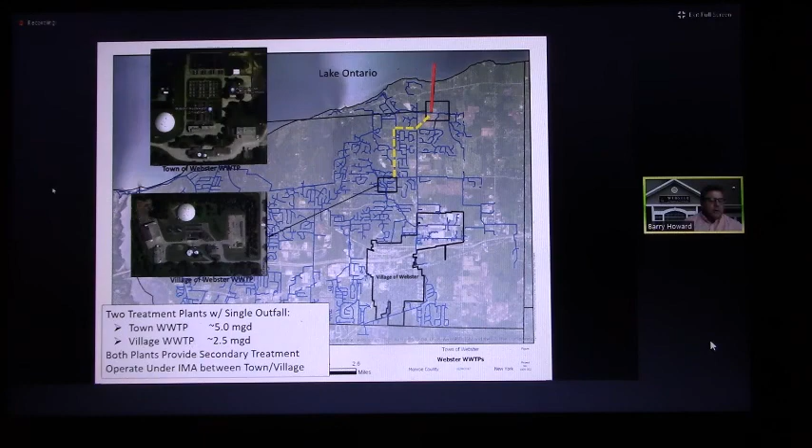So let's look a little bit at the timeline. We have 2 treatment plants right now with a single outfall. We have a treatment plant with the town on Phillips Road that handles approximately a capacity of about 5 million gallons per day. The village wastewater treatment plant on the corner of Route 250 and Wall Road can handle about 2.5 million gallons per day. Both plants provide secondary treatment. Both operate under an intermunicipal agreement, an IMA, between the town and the village. And you can see pictures of those 2 plants in that screen, and then the common outfall in the red line that's there.

So the timeline was that things started back in 2016. The sewage treatment plant issues with both the town and the village have been going on for some time. In the town, in 2016, they did an engineering report. They did phase 1 design, and then construction started in 2019. And phase 1 construction should be completed by December of 2020.

At the same time, in 2017, the village began their engineering report, and they did some funding applications in 2018 and in 2019. And then they started in 2020 in earnest a regional versus village-only evaluation. And then we can go back also on that regional evaluation. We can look at the fact that there were informal discussions back in 2016.

In 2018, there was an October village workshop with a regional alternative overview. And then there was a village committee formed in 2019. And then in 2020, at the beginning of the year, began the monthly joint project committee meetings, which included representatives from both engineering firms, from the town board and staff, and from the village board of trustees and staff.

The next step will be that the village board needs to make a decision, and that's pending into the future. So we've got an idea on the project timelines, and we'll move forward here. And I'm going to introduce Clem Chung from Labella, who's the project manager on the village side, and he will make his presentation now. Thanks, Clem.

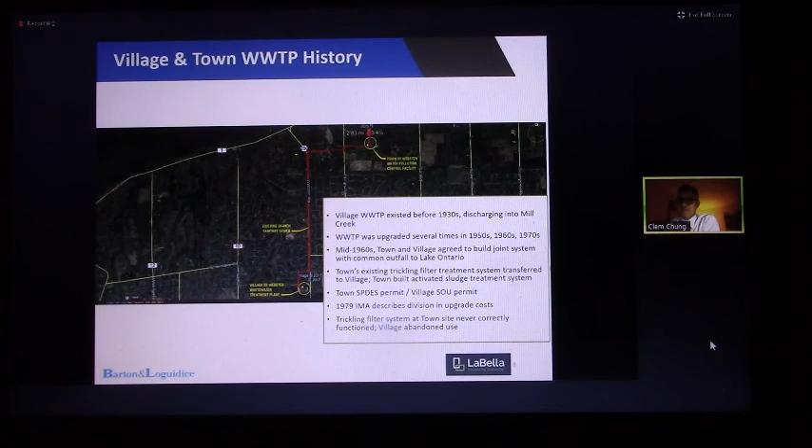In the 1960s, the town and the village came together and agreed to build a joint system with a common outfall into Lake Ontario. At the time, there was a treatment plant both at the town site and the village site that looked very similar. So we'll talk a little bit about the types of treatment systems that are there right now. The one at the village site is called a trickling filter. It's a type of secondary treatment. And the town had a very similar process there.

As part of the agreement between the town and the village in the 1960s, the village agreed to take over the facilities that were there at the town site, and the town would build a completely different type of treatment system called an activated sludge treatment system at the town site, and the flows would be separately treated through each system, so that the village would still be responsible for treating its flows for the most part, and the town would be responsible for treating its flows.

The DEC, or the EPA I should say, required that the town be the entity to obtain what's called a SPDES permit, which allows the municipality to discharge the wastewater after it's been treated back into the environment. So that was the setup that was created. So what happens is there's the two plants at the two sites. The wastewater from the village site goes to or through the town site, and it connects with the wastewater that's been treated in the town plant in a pipe.

There is a little bit of treatment that goes on there that's kind of joint. The town adds a disinfection chemical, chlorine, to the discharge from both plants, and then that treated flow goes out into Lake Ontario through a single pipe. So that's the town's responsibility under their SPDES permit. The village has, as Barry mentioned, an IMA, an intermunicipal agreement with the town to kind of share that treatment and share the costs of maintaining and operating that system.

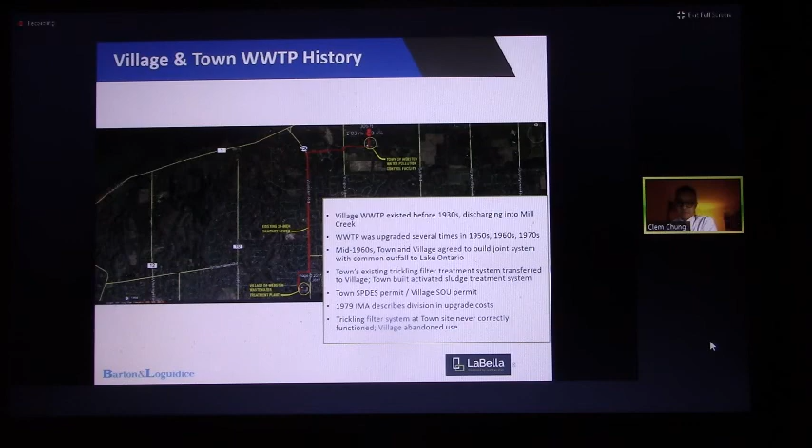So as Barry mentioned, there were separate evaluations done on the village plant and the town site, and they were both instigated by conditions that were deteriorating at both of the facilities. So I'm going to talk about the village project, and then Ken Knudsen from Barton & Loguidice will talk about the town's project. So jumping ahead a little bit in history, just some of the more recent things that have led to the condition deterioration at the village site.

There was a deteriorating, what we call headworks. So that's the facility at the beginning of the plant that takes out all of the large debris, rags, grit from the wastewater, and protects the downstream processes. That structure and process was constructed in 2007. Unfortunately, prior to that point, all of that material that hadn't been removed eventually got through the process and started impacting the operation of the anaerobic digester.

So in 2015, the village realized it had a problem, and they hired LaBella to start looking at the condition of the digester. There were some recommendations for fixes and to upgrade the digester. At the time, it was considered an emergency issue, and actually in 2016, it got to the point where the gas piping within the digester broke and caused a safety hazard. So the village had to do something immediately. They couldn't plan for a capital project to upgrade that, but there was a significant price tag to that.

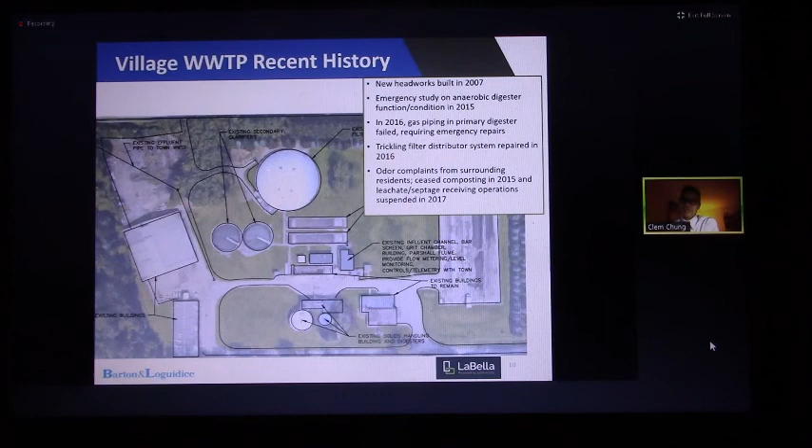One other issue that was pretty significant to how the plant was operated was that there were some odor complaints from the surrounding residents. The village believes that the majority of that came from the operation they had to compost their sewage sludge. The location on the site was very close to the road, and they were concerned that was what was causing those odor complaints. So they ceased operations of that in 2015. They also curtailed their leachate and septage receiving operations in 2017 to further help mitigate those issues. But in the end, there were some additional upgrades that were needed for the plant, which I'll talk about in a minute.

So, as I mentioned, there were some alternatives that the village asked us to take a look at to upgrading the plant, and those were potentially taking the flow to the town's plant, and also taking the flows to Monroe County and discharging into their plant at Van Lare, which is near Durand Eastman Park.

So the first alternative we looked at was taking it to the town. The way that we envisioned that upgrade was to decommission the village plant and then take the flows through the existing pipe that connects the two sites, and essentially rehabilitate the infrastructure that hadn't been working back in the 60s, basically make that more viable. We didn't look very closely at the treatment process that the town currently uses, because we knew that the town was looking to upgrade their facilities, and we knew that Barton & Loguidice was doing their own evaluation.

So at this time, we needed to submit a report to start the funding process, and we didn't have time at that point to wait for the other analysis to be concluded at the town plant. So that's kind of what we looked at. If we were to look at what made the most sense, we probably wouldn't have considered that as a viable alternative the way that we had in terms of rehabilitating the village infrastructure at the town plant. So that kind of leads on later to this discussion about the regional alternative. The estimated cost of that analysis was about 11.6 million back in 2017.

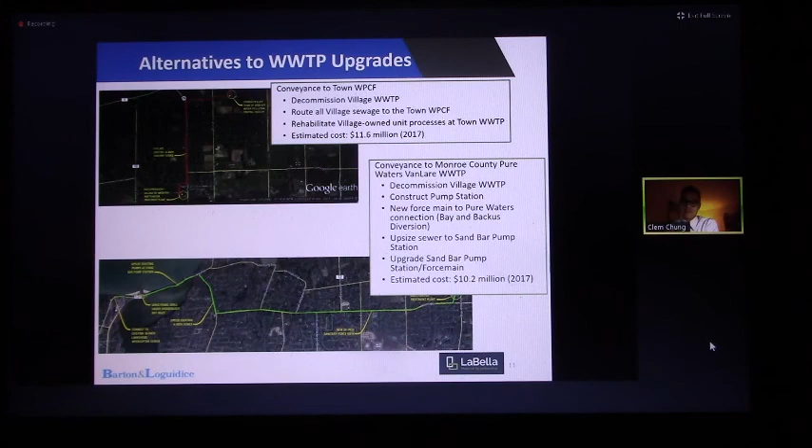So looking at the biggest change really is with the new administration at the town. They've evaluated the recommended upgrades to the village-only project and said that if the village were to go ahead with those projects, they would require the village to update the IMA and also to obtain their own SPDES permit. So in order to acquire that permit, we had a conversation with the Department of Environmental Conservation, DEC, and asked them what would we need to add to the original recommendations to make it such that the village could get a SPDES permit. Our assumption during the evaluation was that the existing situation with the IMA and the SPDES permit would continue.

So with those changes, the DEC said, well, you're going to have to increase the redundancy of your secondary process. So in that case, it would mean decommissioning the existing trickling filter, which is kind of oversized for the flows that we currently see, and replace it with two individually smaller units but have the same capacity as a combined unit to treat the flows. We would also need to include disinfection for the village itself. So right now, as I mentioned at the beginning, the town provides that service to the village. This would require an upgrade to the village plant to allow that to happen. So we would be looking at the UV disinfection system to be installed at the end of the treatment process for the village.

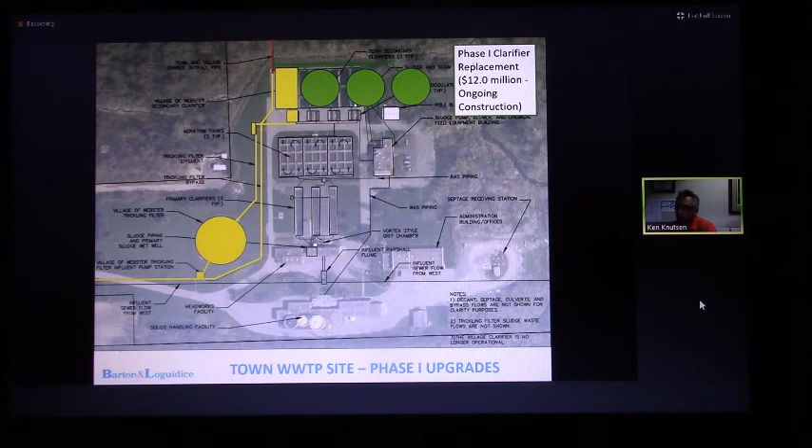Those were in critical condition, and that said, the town opted to divide the recommended improvements up into phases. Phase 1 project, which Barry noted on the timeline, commenced in earnest in 2018 through design, started construction in 2019, and essentially has consisted of the construction of 3 90-foot diameter circular clarifiers to replace 3 pre-existing rectangular clarifiers. This is a fairly substantial project. It's a $12 million project, which the town has secured a $3 million grant for.

Progress has been pretty substantial to date. So to orient you here again, this is the effluent sewer from the village treatment plant going to the common outfall sewer, which heads out to Lake Ontario. This was where the rectangular clarifiers were. This is new clarifier 3, new clarifier 2. These are online and operational right now, which has now then allowed the existing rectangular clarifiers to be taken offline.

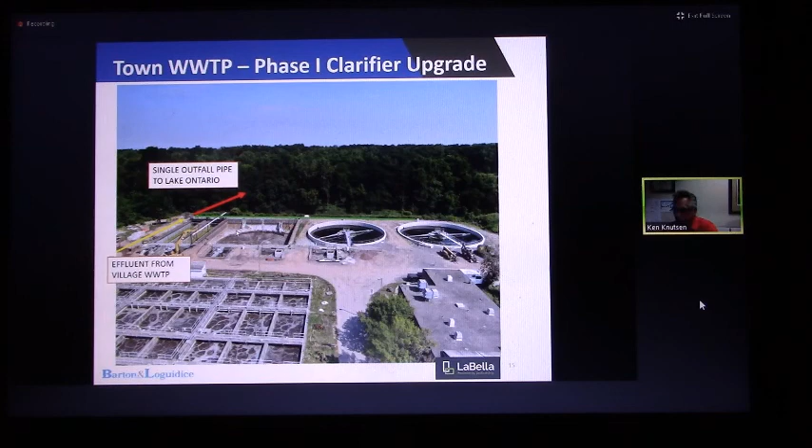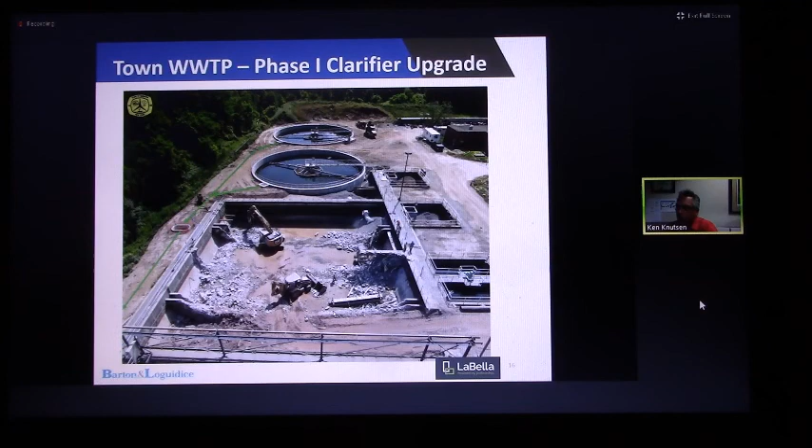As you see it here, phasing of the project was very important, led to some of the costs of this, but it also allowed the contractor to creatively use the existing clarifiers as support systems for their trenching. You can see that, again, the village's existing clarifier still remains intact. That would be recycled in the future, which I'll get into.

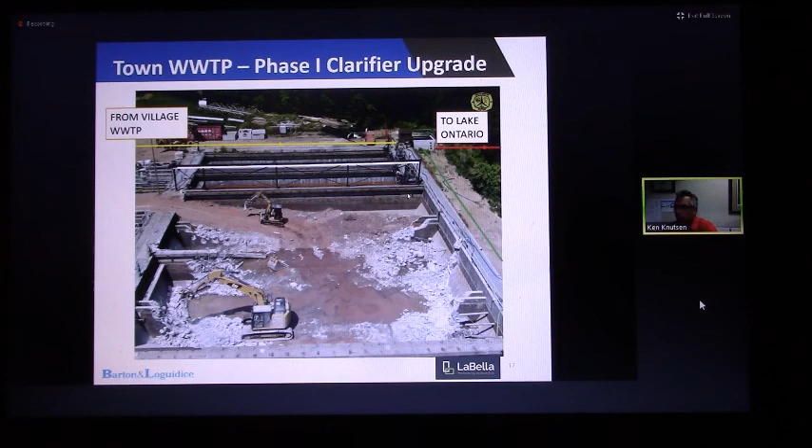We did drop in a new outfall pipe from the town's clarifiers into a new structure. So again, right now the village's effluent comes into the structure treated. The town's effluent comes in here treated. The town chlorinates, and the combined waste goes to Lake Ontario. It's chlorinated. And here's an aerial drone shot of the amount of steel that goes into a 90-foot diameter clarifier, just to give you some perspective on the size of these things.

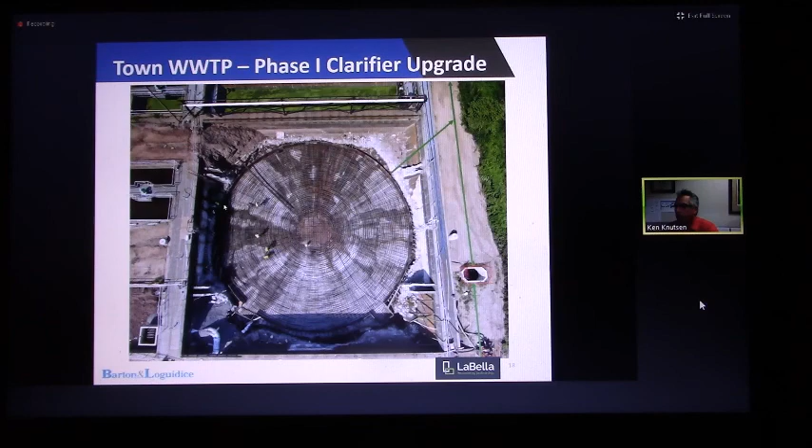So the town has progressed that major infrastructure improvement. Some of the ancillary improvements that are also being done here under phase one, integral to the clarifiers, are withdrawal and pumping of the waste solids that settle out. So they entirely revamped their solids handling pumps, piping and flow meters, and the instrumentation and control, brought that up to date. Basically hardened these pumps against any flooding in the basement where they're located.

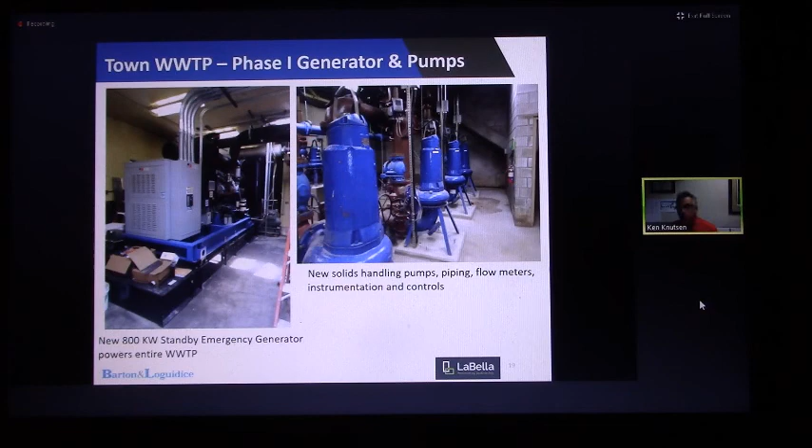And in addition to that, as Clem mentioned, the emergency generator, the prior generator at the town plant was woefully undersized, could not keep the aeration system running. This new 800 kilowatt standby generator is large enough to power phase two, as well as the improvements that would be envisioned under a regional option should it go in that direction.

So phase two improvements essentially would cover other unit processes beyond the secondary clarifiers, effluent disinfection, the biological treatment process, and additional primary clarifiers, building improvements, and then some fairly substantial improvements to the solids handling or the anaerobic digester system. The cost of phase two, in addition to the current $12 million project, would be another $19.7 million, escalated to 2023 dollars.

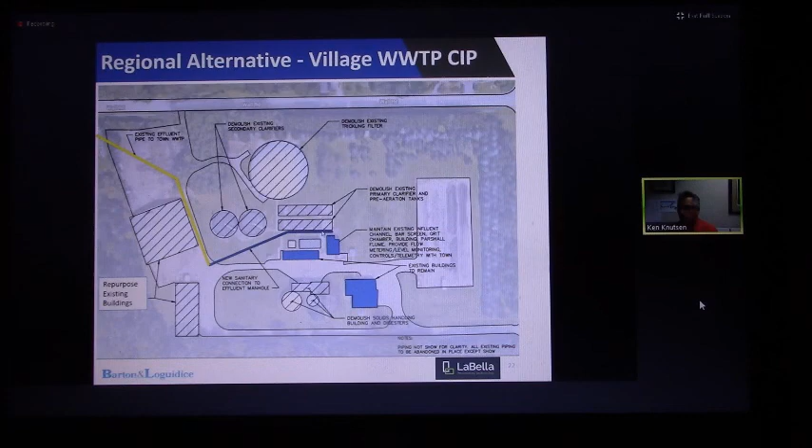What would be needed to further expand that to accommodate the flows and loads from the village during the 20-year planning period would be the addition of one more primary clarifier, some piping modifications to intercept the effluent from the village, a new 90-foot secondary clarifier, as well as slightly upsizing the solids handling facilities in the digesters. And that's essentially it. So that 19.7 cost for a phase two, if we were to now treat the village waste at a regional facility, would increase to a project cost of about $27.7 million.

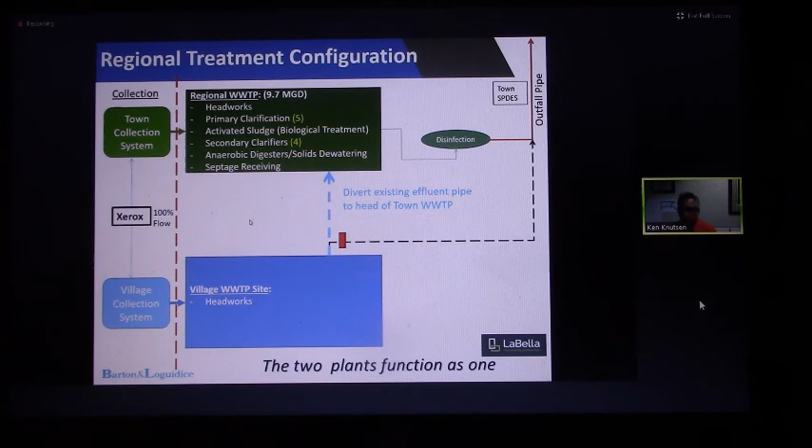In this configuration, however, again with a simple diversion here and maintaining the headworks at the village's site, the collection systems will remain status quo. We don't envision any changes to the Xerox flow patterns, and the costs, which we will discuss tonight, are therefore only related to treatment plant, debt service, and operation and maintenance. And Barry is going to take it from there.

And so, if we were to move into a regional wastewater treatment plant, the users would be slightly balanced out. About 65% of the sewage that goes through the plant would be from residential, and about 19% would come from Xerox, and then the rest coming from a portion of Penfield and commercial industrial. I also just want to note that the current town sewer rate is $173 per EDU, and the current village rate is about $150 per EDU.

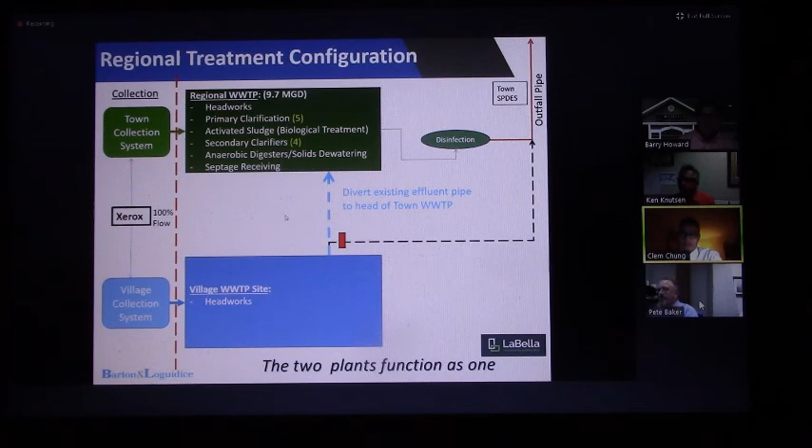I'm not sure if this helps, but maybe to understand the process, the grants are applied to the total project cost, and it lowers the total project cost, no matter what the project is. Then the distribution of that total project cost is calculated between the number of users. Okay, I think that does answer the question.

So I want to just talk about a couple of things about operators, a couple of questions. What is the top grade of operator at the town plant? Does anybody know the answer to that? Maybe Pete does. 4A. 4A is currently at the town plant, okay.

What would be the financial impact if the village lost the Xerox flow? We talked about this as an issue with Xerox, and so I think that you guys have done some analysis on that. Can you bring that slide up, Ken? Let's see here. So we looked at it two ways, both for the regional plant as well as the village-only upgrade, and this considers the amount of EDUs or flow that goes to each facility.

So there's been questions here about debt and operation and maintenance, and we don't have a crystal ball that's going to look 20 to 30 years down the line over the life of these upgraded facilities. However, we can make a bet that inflation is going to go up, that the municipal boards are going to want to increase their rates on an annual basis to keep up with inflation, and also to create a kitty to pay for equipment that might be breaking down that they have to maintain.

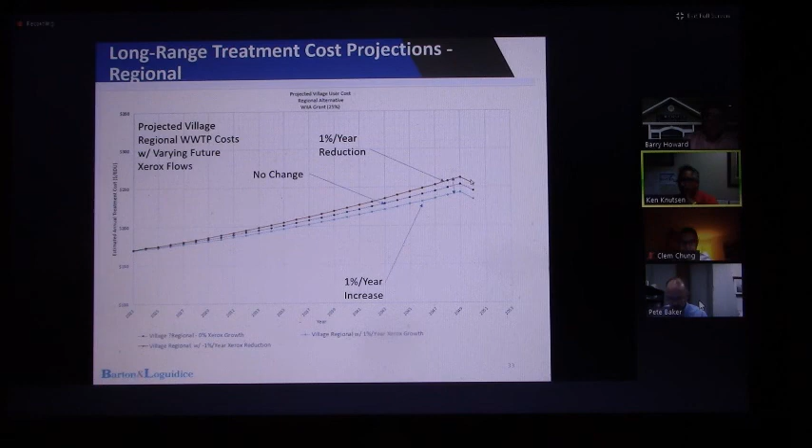So these cost curves here reflect what a village user would pay if Xerox started to lose 1% per year of its EDUs or flow, if there were no change, or if there was a 1% increase in users at that site. So you can see what's reflected here, that it does make a slight difference. It's not a lot looking out ahead at the regional plant. However, it does widen the gap here because it is such a substantial user at the village-only plant. There's a wider gap, should we start to see increases or decreases at Xerox.

Pete, do you want to add anything? Yeah, I think that it's a significant delta between the two, and the largest reason is the rates. The cost to operate the plants isn't necessarily going up, but what does decrease is the denominator, the bottom line in that equation, under the scenario of a blanket assumption of 1% increase, 1% decrease per year. Those EDUs at the village end, currently about 60% of the flow is from Xerox. So if that base from Xerox is decreased, that would lead to a relatively rapid increase.

The reality is, again, this is a crystal ball. This is an example scenario. But what this is intended to show is that there's more sensitivity with respect to the village plant and any significant changes in Xerox flows than there would be with more users, more EDUs on the regional option. It's better suited to absorb any changes. Conversely, if there's a 1% growth in Xerox, the village rate would in turn decrease that much more rapidly as well, as is shown by that bottom line.

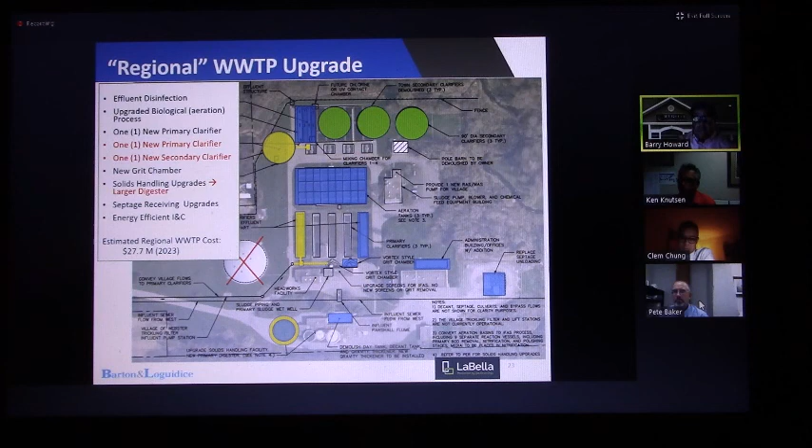Okay, thank you. And this question: if bigger is cheaper, can anyone explain why the town processes 3 times the flow of the village for more than 4.5 times the cost? I think again that we have addressed that in the existing expenses and then the projection out. And so while there is a difference, the new plant is going to have differences, and those have been calculated in by the engineers.

Would the town allow the village to go to the town 10 years from now? I'm not sure who should answer that question. Maybe I could have the town supervisor come on. Or Ken, did you have a comment on that?

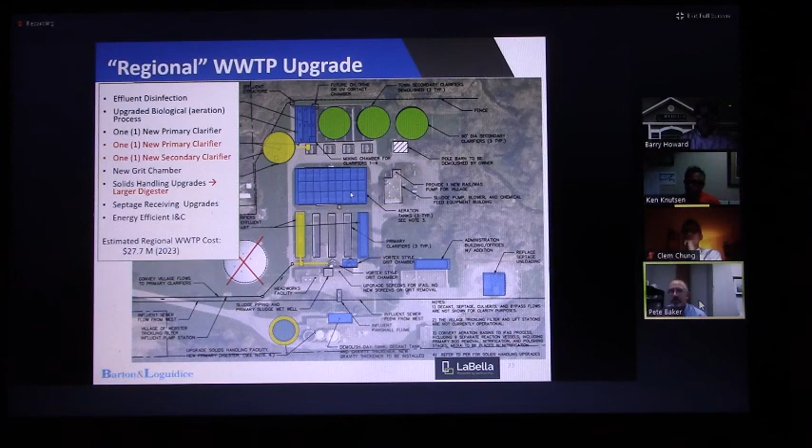I would just say from an engineering standpoint, again, this phase 2 town plant, which I'll go to here, if it were town only, is going to be sized to handle about 7.4. It's not designed to handle the flow and load from the village. And I guess in working with the town board in discussion with the village board, this is kind of a once in a lifetime opportunity here. It is an opportunity, which is why it's been brought to the village at this time.

So, Ken, just to paraphrase what you just said, the changes necessary at the town treatment plant to do that are going to take place in phase 2 of the current upgrade. And if we go 10 years down the road and phase 2 has been done with only the town in mind, then we would be missing out on that opportunity. And we don't know what the costs would be to modify the plant at that point in time.

Correct, and it's going to be a lot more cost effective to do it all at once, because anything done in the village in the future would be done purely for the benefit of the village user base, and therefore all debt associated with that would fall on the village. There would be no benefit for the town to do that at this point or at that point. Okay.

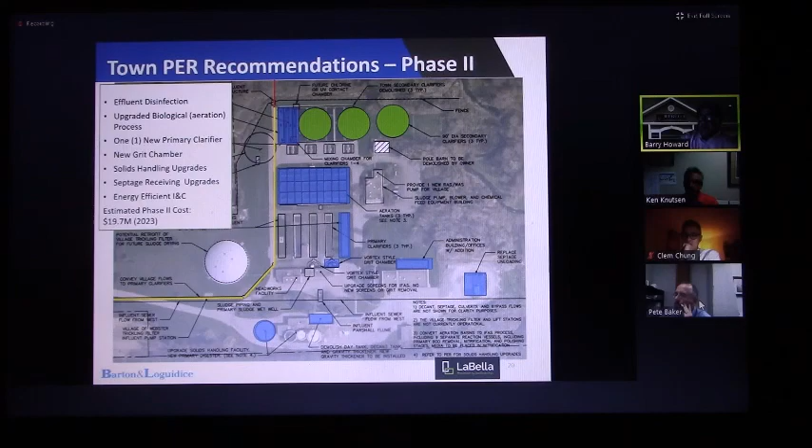How many EDUs would the village lose if Xerox went offline? I think that's on our pie chart one. Right now, there's 635 EDUs going into the town plant and 4,126, a total of 4,761 going into the plant now. If that Xerox campus shut down and was shuttered completely, then I believe that would take away 4,761 EDUs. Correct me if I'm wrong, either of the engineers.

It's my understanding there are some flows from Xerox. They have a remediation system, so I think there are some base flows from Xerox that would still continue, but it would be significant. It would be over 4,000, to say the least. It may not be 100%, but it's going to be close to it.

I think it's also worth mentioning that if Xerox goes away, there is a component of the cost that's involved in that too, because the flows are also reduced. But I don't know if there's a linear relationship between the EDUs and the amount of cost that's associated with treating that flow.

Okay. The regional plant, capital investment for the life of the study for 20 years. This question says there has been no additional capital investment for the life of the study for 20 years, and the village plan included a phased-in approach. Is this realistic? So can you talk about, Ken, maybe start with the regional plant in the life of the plant for the study?

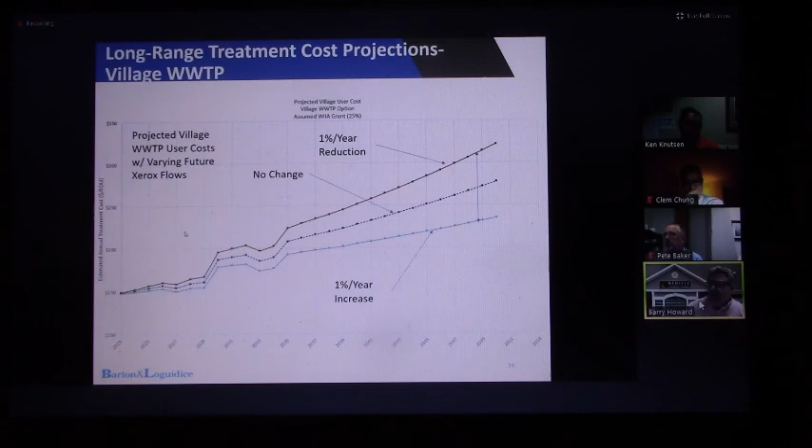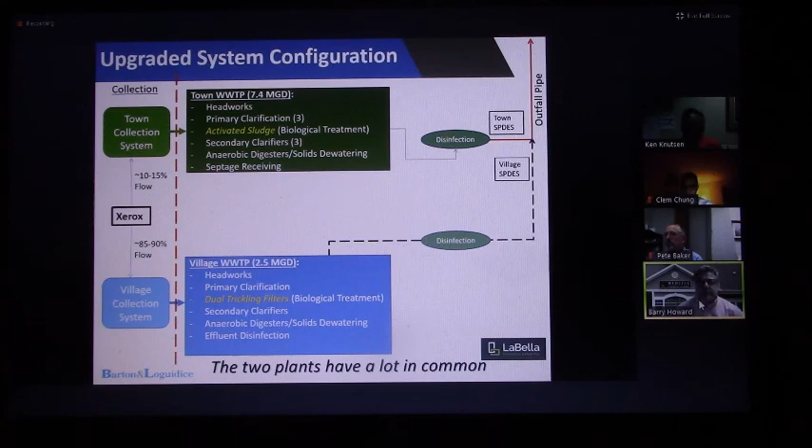So I think if you back up a couple of slides, Ken, I think we can put that red line between the two that you talked about when you did your presentation. One right there. These two, when the system upgrade was calculated, the numbers do not include the town collection system or the village collection system. Those would need to continue, and then they would be billed out separately to the village users and the town users. Is that correct? Am I making that clear, or am I not thinking correctly here? That's correct. Okay, I just wanted to make sure that. So we can pull that question out.

And this question is, I want to make sure it gets in there because it's as much a statement as it is a question. So to plainly state this, the engineering firms are recommending the regional plan. Is this correct? I won't put either of you on the spot.

And I will just preface by saying the engineers were hired to study and analyze the needs and the costs for the village and for the town in its plans, phase 1 and phase 2, and then look at a regional approach. I do not believe that either of them have said this is the way to go. They've just presented the data to the trustees that are going to make that decision. Is that a correct summary? Yeah, I think that's fair.

I think one thing that we stated at the beginning is that this is a presentation on the treatment plants and the alternatives we looked at the treatment plants. There are other considerations that both boards would have to consider, which we aren't necessarily well placed to speak to. So I don't think that we could necessarily make a recommendation without having the best information as to those considerations. I think those considerations have to be more carefully adjudicated by the boards themselves.

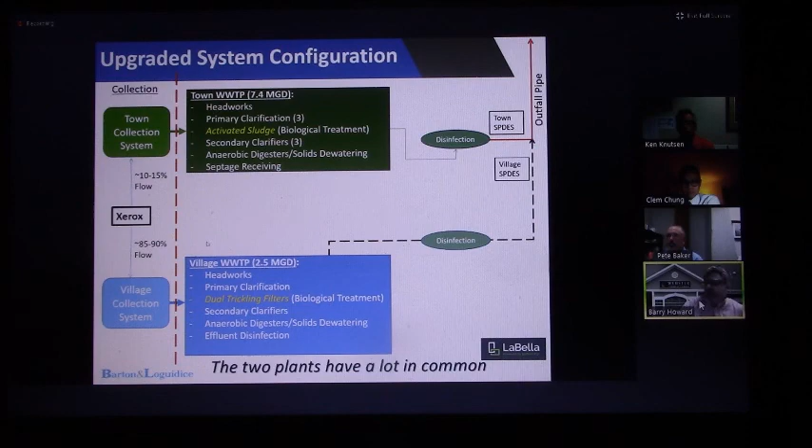One of the things that I want to back up to are the non-monetary. Can you bring that slide up for me, Ken? One of the things that I want to talk about briefly right here is that there are future revenue opportunities both for septage, which was used in the past in the village, and waste gas to energy, which I believe has been built into the town's plant, that there's the potential there that some gas could be captured and used for energy, which might offset some costs, something that could happen in the future. Can you just comment on that, Ken?

The current phase 2 plan and costs include improvements to the town's current or existing septage receiving station, which they have in place, and capacity would be designed into the upgrades to accommodate a certain amount of septage per day, per week, and so on.

This waste gas to energy system is not currently in the proposed improvements beyond having the anaerobic digester capacity, which is there. What would have to happen to implement that would be accepting probably some high strength waste, which is where the revenue would come from, capturing and holding the additional gas generated by that waste, and cleaning that and running it through a new generator that could then be connected to the power system at the plant, and that would basically offset power that's being purchased from the grid.